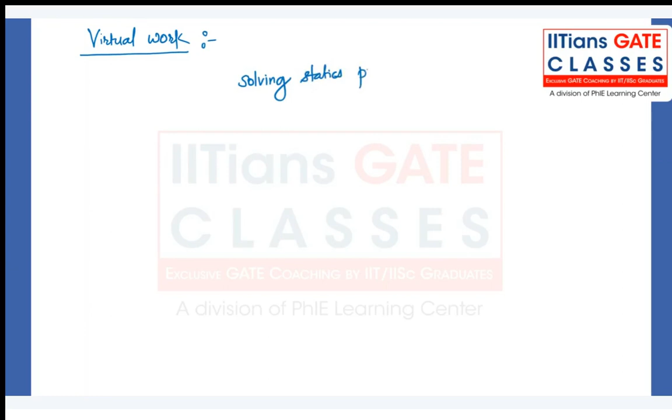So till now, if you remember, the way we solve problems is by using the equilibrium equations. Solving statics problems, there are two ways to do it: either with the equilibrium equations, summation of all forces equal to zero, summation of all moments equal to zero. Depending on direction, you will apply summation x, summation y and all. And there is one more way, that is the virtual work method.

It is not mandatory that the problem should be solved by virtual work only, and that is the reason we have not studied it when we were studying statics. Generally, everyone prefers the equilibrium method and it is commonly used to solve problems. But there is an alternative method. You should be aware of it; you may not use it in future, but it is good to know. It's optional, you can still solve the problem with the equations of equilibrium. And we use it in statics mainly.

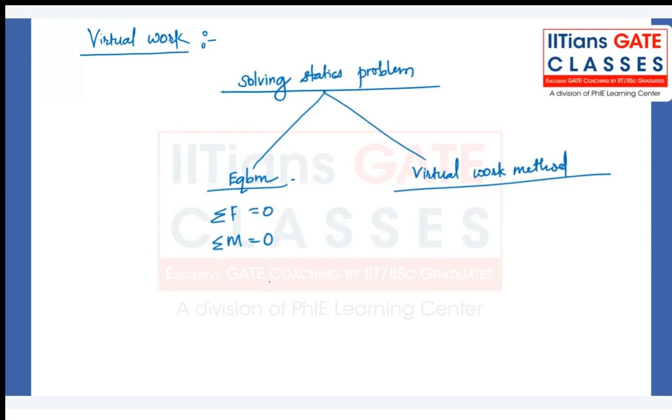When a body is in equilibrium, there is no displacement to the body. The body is at rest, and summation of all forces and moments equals 0. But if we imagine a displacement, let's call it a virtual displacement. You can denote it by delta theta or delta s, whatever notation you want. Generally delta s and delta theta are used for linear displacement and angular displacement.

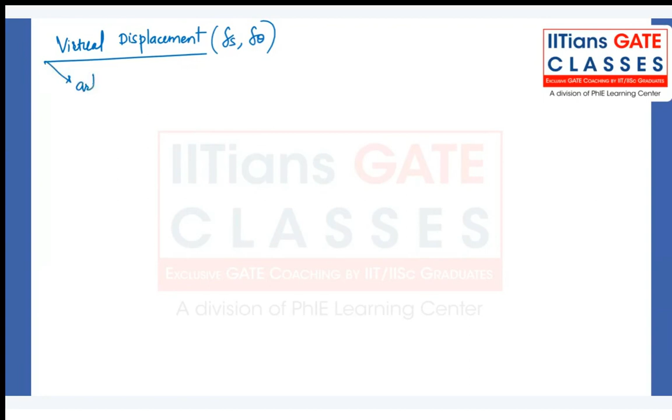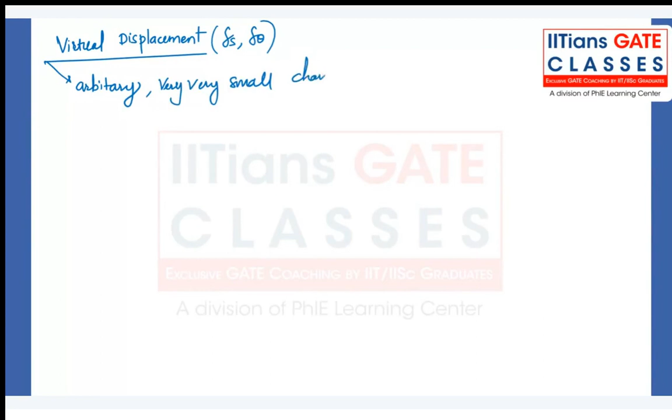Virtual displacement is an arbitrary, infinitesimally small change in the position of the particle, consistent with the constraint imposed on it. So write down the definition: virtual displacement of a particle is an arbitrary, infinitesimally small, very small change in the position of the particle, consistent with the constraint imposed on the particle.

So it's an imaginary displacement. In reality it is not happening, because the body is in equilibrium, it is at rest, it is not moving. But in order to solve it, we are imagining a small displacement, let's say delta s, and that will help us calculate work, because force into displacement is work, and it will help us solve the problem.

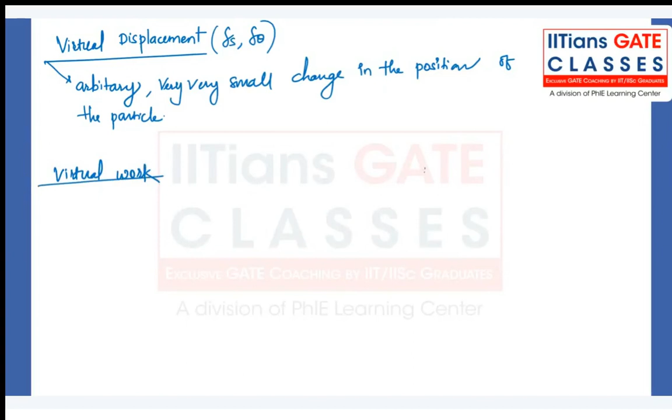So if we have a body like this, kept on a horizontal surface, and a force P is applied, and the imaginary displacement is delta s, then the work here will be P cos theta.

Okay, P cos of theta into delta S. Okay, delta S is a virtual displacement. Then this work, I'll say it as a virtual work. Okay, I hope you are getting it.

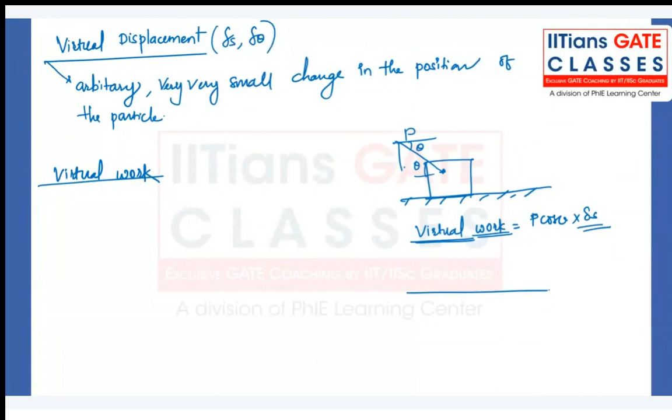Similarly, if we have, let's say, a beam and you are applying some moment over here, and because of this moment, let's say there is a small change in angle, that is delta theta, then work because of this moment is moment into theta, and in this case I'll call it a virtual work.

So what is virtual work? Virtual work is the work done in producing a virtual displacement. Work done in producing virtual displacement.

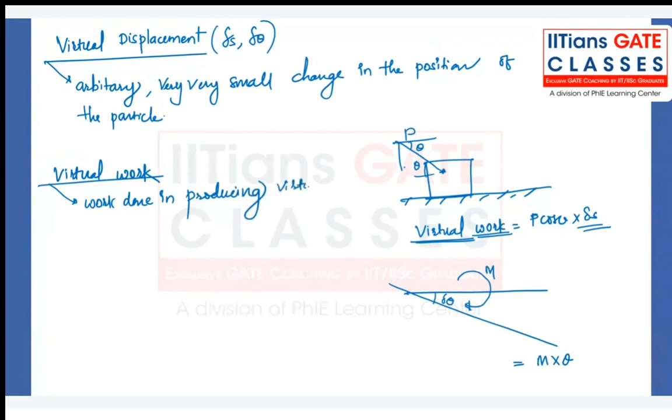Okay, so delta U, let's say virtual work, generally we denote it by delta U, and that is equal to F times delta S. Okay, and we know now what is virtual displacement, we know the force, and we also understood virtual work. But what is the principle of virtual work? What does this principle say? So write down the heading: principle of virtual work.

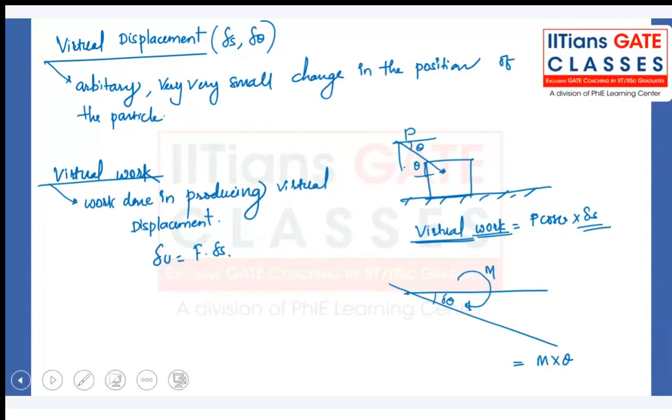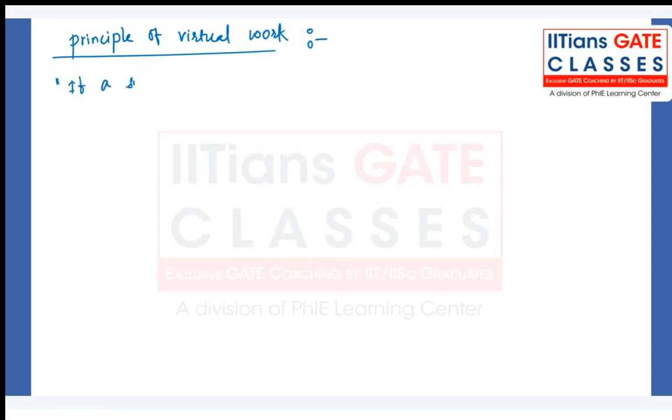Write down the heading: principle of virtual work. If a single rigid body, or a system of rigid bodies, is in equilibrium, then

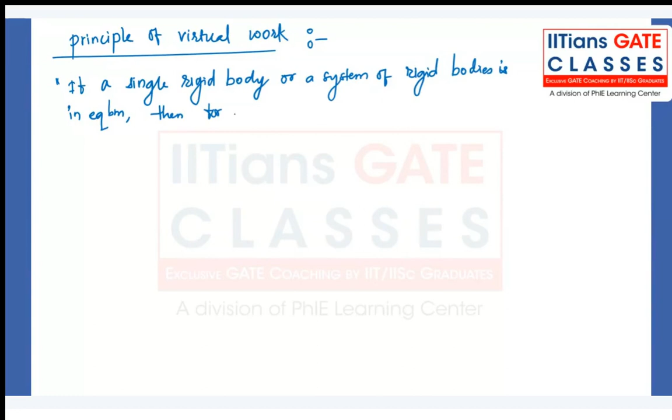for any virtual displacements with the constraints on the system, the virtual work done on the system is zero. Okay, so this is the statement of the

principle of virtual work. Okay, so in short, total virtual work of external forces acting on the body is zero. Or in other words, constraint on the system means, Abhishek, the supports which you are giving. So you are, let's say, giving a fixed support at one end maybe, or a roller support at the other end, so you are keeping it the same. It means your reactions will remain the same, they will not change.

So constraint means, as I explained, if you put a roller support, you're putting a constraint on the vertical motion of this beam. If you are putting a pin joint, you are putting the constraint not just on the vertical displacement but also on the horizontal displacement. And if you have a fixed support, then you are putting the constraint on the vertical direction, also the horizontal direction, and also on the moment.

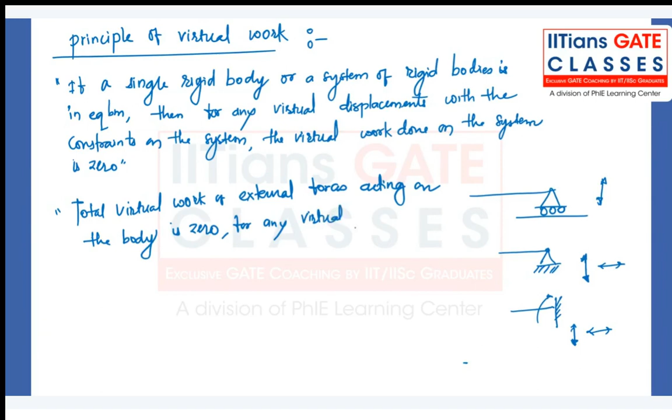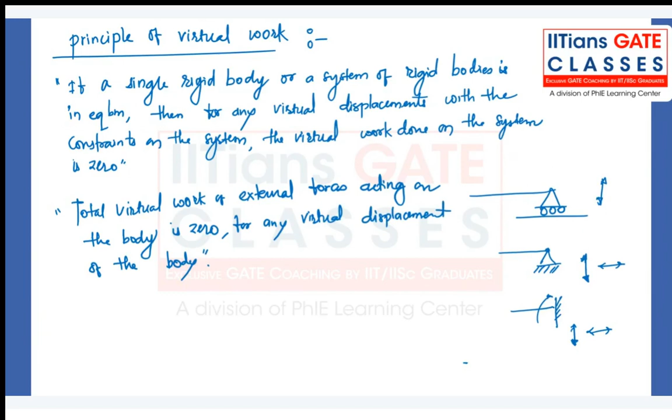Yeah. So in simple words, the statement can be written as: total virtual work of external forces acting on the body is zero for any virtual displacement of the body. Okay, so in this way also you can write the statement. Let's start with a simple understanding of it.

So if I give you a block and ask you to apply the equilibrium equation to it. Suppose I put a block of weight W and ask you to calculate the reaction from the ground. What you will say is, this block is at rest, it is in equilibrium, so summation of all forces in the vertical direction has to be zero. Ground will create a vertically upward reaction, that is N, and hence N will be equal to the weight of the body. That's all you will say, right? There is no need for any complexity in this.

But now, if you want to apply the principle of virtual work to this, how will it look? So let's say this is the centroid G, and imagine that G is moved because of the weight to G dash, something like this. There is a change in position in the vertical direction from G to G dash, and this position change is delta Y, for example. Delta S, so in the y direction, we take it as delta Y.

So what is the work done for this virtual displacement delta Y? Displacement is downward, weight is also acting downward, so it's positive work, W into delta Y, minus, since the reaction is upward, N times delta Y, is equal to 0.

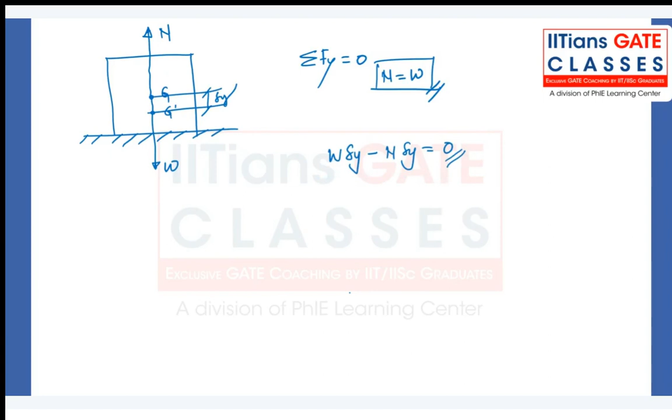According to the principle of virtual work, this is the total work done because of the external forces acting on the body, and that has to be 0. That is why we are writing equal to 0 here. Is it clear till this? And now if you equate, W delta Y is equal to N delta Y, and delta Y will get cancelled, and W is equal to N.

Okay, so this is the way we can still get the reaction if you don't want to use the equations of equilibrium. But ultimately it is the same thing, right? Generally everyone feels this is complicated or unnecessary extra work we are doing by applying the principle of virtual work, and nobody uses it mainly in real life, because the equations of equilibrium make life a little bit easier than the virtual work concept. But still you should be aware of it.

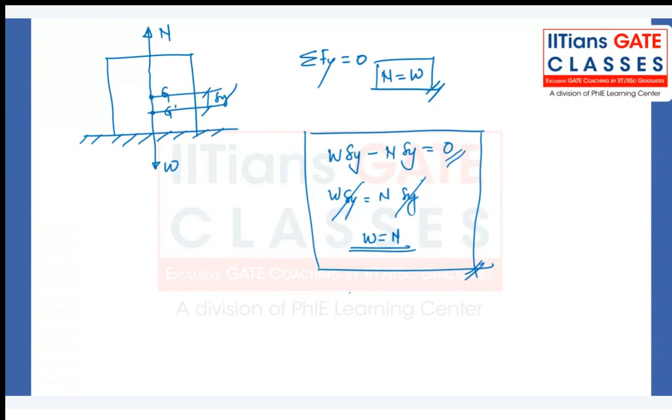In some cases, if you need, you will be able to solve it, maybe in some theory questions in future. But for GATE, they'll not specify that you have to solve the problem by virtual work. They just need the reactions, or they need the force. Then you will be able to calculate it just by equations of equilibrium.

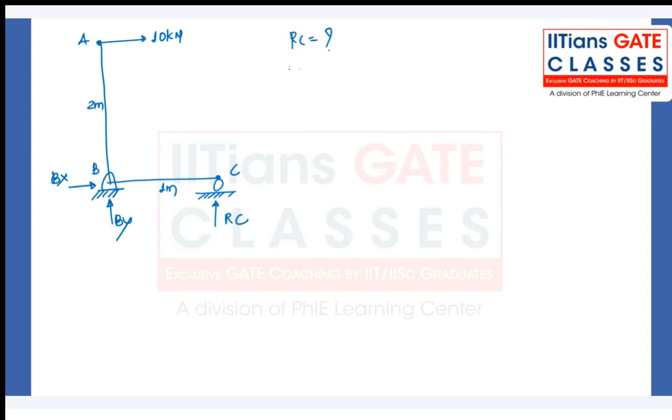Summation of all moments about point B is equal to 0. This is an equation of equilibrium you will apply. So you'll say 10 multiplied by 2 has to be equal to RC multiplied by 1. This implies RC is equal to 20. That's all. Within a few seconds, you will get the answer. But if I ask you to solve this by virtual work, it will look like this. Imagine that you are turning this with a displacement delta theta. Something like this it will look.

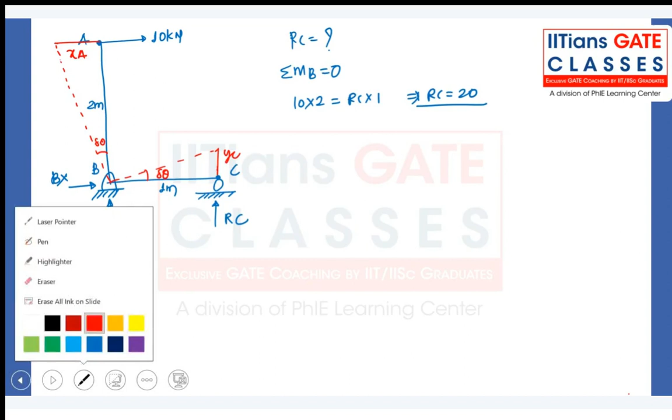Delta theta displacement, and let's say XC is the displacement here, and XA is the displacement over here. Or this should be YC because this is in the Y direction. YC is the vertical displacement of point C, XA is the horizontal displacement of point A. So if I want to calculate the value of XA, how much will it be? Apply the logic here, that is R theta, for a small displacement. So it is 2 delta theta, and YC I can say is 1 times delta theta, right?

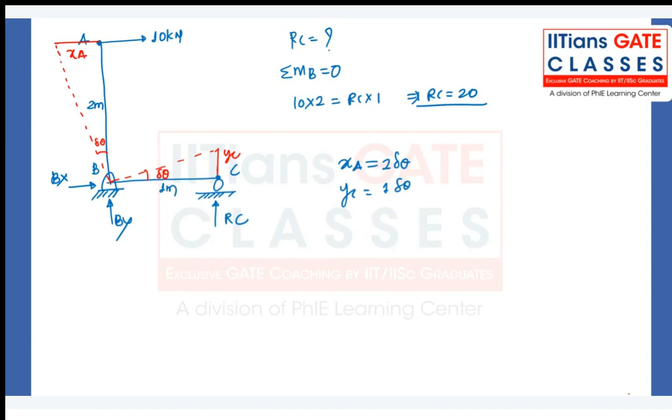And now if you calculate the work done here, 10 is applied in the rightward direction, but displacement is leftward, so it's negative work, minus 10 XA. Here RC is applied in the same direction as the displacement, so it's positive work done, RC into YC, that is equal to 0. And now if you put the XA value, XA is 2 times delta theta, plus RC times YC, which is 1 times delta theta, equal to 0. Delta theta will cancel, and you will get RC is equal to 20.

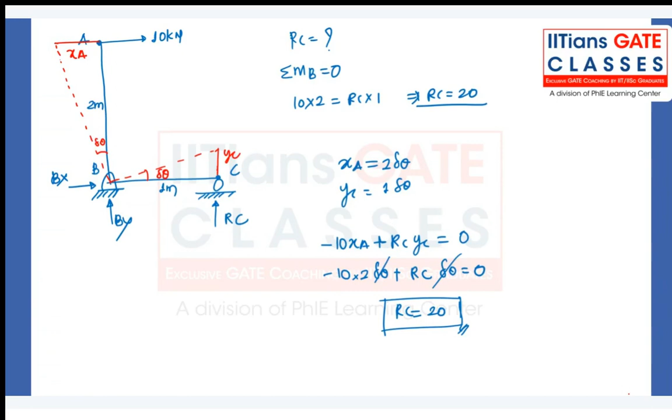In this way also you can find it, but you can clearly see here, compared to the equation of equilibrium, this takes a little more time, I would say, rather than saying it is complicated. But this is the way you can convert the problem into the work done, and the total work done of the system is 0, and that's how you will calculate the reactions.

Okay. Let me give you another simple question. Maybe this one you try to solve with the virtual work.

Yes, Abhishek, you can assume it as a clockwise moment as well. Okay, it's not a problem. So if you rotate it clockwise, what will happen? RC will be upward, but your YC will be downward. So in that case the equation will look something like this: minus RC into YC, and XA will be in the direction of 10, so plus 10 into XA equal to 0. This is how your equation will look, Abhishek. Is it clear?

And ultimately, you put this value, you should get RC.

Okay. Yeah, Sandeep, you can ask your doubt. You have raised your hand. Feel free to ask your doubt. You can unmute and ask. Yes, sir. Same question I was asking. You got it after that. Okay. Yes, no problem. Okay, sir.

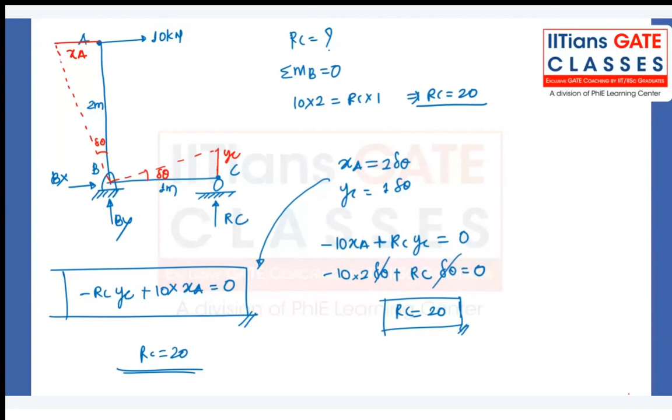Sir, the previous question I did not write. Okay. I'll wait for 2 minutes. You can write and just put a message in the group once you are done. Okay, fine.

Then take the next question. We have a pin support at one end, and at the other end we have the roller support. Let's call this point A. Here we have point B, and then we have point C. At point B, we are applying a load of 10 kilonewton. Point B is 2 meters from A, and C is 3 meters from point B. So the question here is, calculate RC.

If you use the equation of equilibrium, within a second you can answer it. 10 multiplied by 2 is equal to RC multiplied by 3, RC multiplied by 5, sorry. Hence RC will be equal to 4. That's all. Correct. But I want you to solve this question by virtual work, because we are studying that concept.

So imagine the displacement of points A, B, C about point A. Let's consider they are rotating about point A because we are putting the constraint at point A, and point C can freely move. You can do it about point C, that's not a problem, but let's keep it at point A because we want to find the reaction at point C.

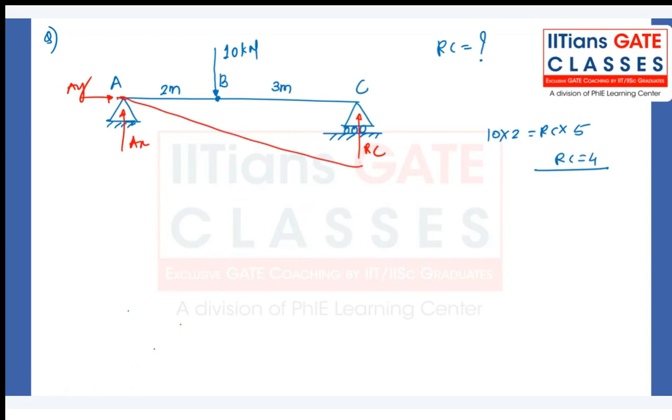Let me just draw the free body diagram first, the reactions here. RC will look like this, and this is AX, and this is AY. Why I'm rotating this about point A is because the unknown here is RC. That is what we have to calculate. If you want to calculate the reaction at A, then you can do it the other way around. Fine. This is RC. So this delta theta is a small angle with which we are rotating this beam.

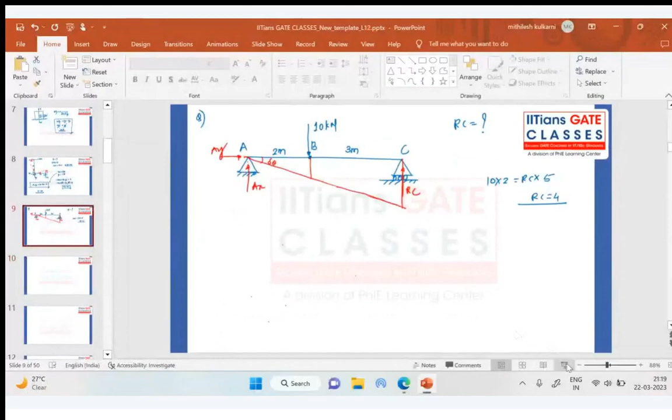Okay. Just a minute. Yeah. So I'll share again.

So now, let's say this is the displacement at point B. We can call it YB, and here YC is the displacement. B to B dash is YB, and C to C dash is YC. So what is YB? YB here is delta theta into 2, so 2 delta theta. And what is YC here? It's 5 delta theta.

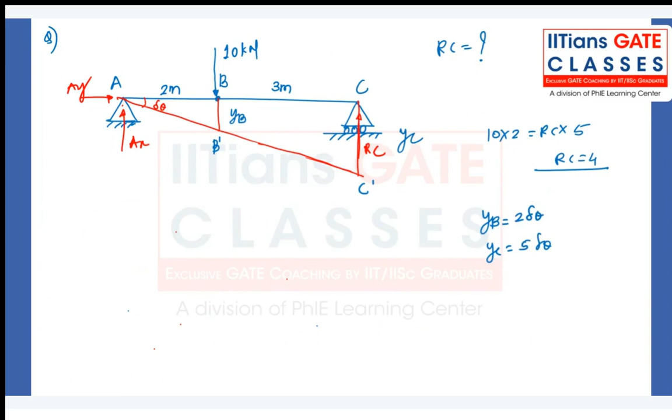Now, according to the principle of virtual work, total virtual work is equal to 0. And how much is the total virtual work here? We have 10 into YB minus RC into YC equal to 0. We consider this as positive work and this as negative work because of the direction of the force and the displacement. If it is the same, we consider it positive. If it is opposite, we consider it negative.

So from this we get 10 times YB is equal to RC times YC. YB is 2 times delta theta, and YC is 5 times delta theta. So delta theta will get cancelled. 20 divided by 5 is 4. So RC is equal to 4 kilonewton.

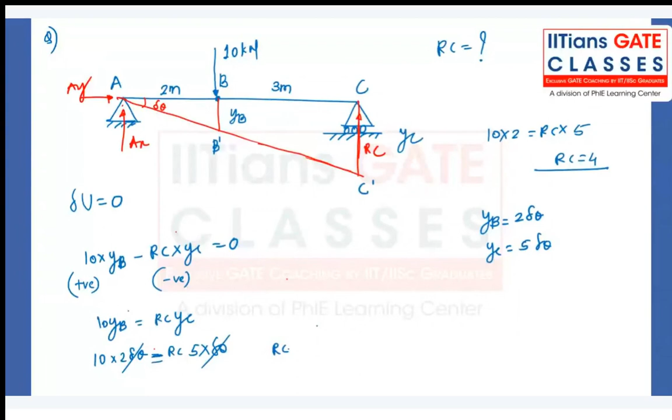So you can solve the problem either by equation of equilibrium or by virtual work. It's more or less the same, but generally I would suggest you use the normal equation of equilibrium, because this adds a little bit of complexity to the problem and will take more of your time. Okay.

So this problem is useful everywhere. It's not like this is an alternative way. You might have studied, let's say, the vibration topic, and in the vibration topic you are creating the equation of motion not with just one method, but you can use multiple methods to solve it, right? And that's what we'll study again in the Lagrange equation as well, when I come to there. So it's an alternative method. I would not say that in this case of problems you should use this, and in another set you should use that. It's not like that. It's an alternative method you can use for any problem.

In the principle of virtual work, the concept or methodology, or approach, which they are using is the work approach. That is, the total work done by the system, if it is in equilibrium, is zero. And that is the approach this concept is having. And the initial concept, that is the equilibrium concept, is that the summation of all the forces and moments when the body is in equilibrium is zero. Okay, so these two are parallel approaches, and both are equal.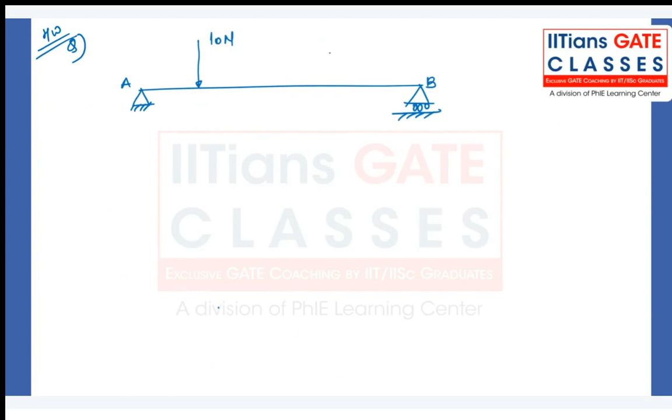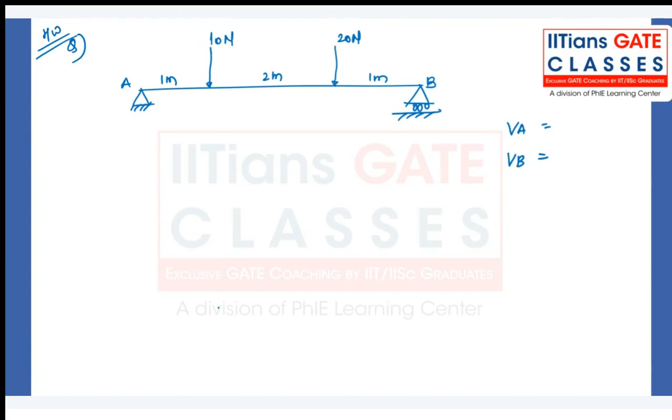So here, in this problem, AB is the beam. A simply supported beam, and then we have a 10 Newton force. Then we have a 20 Newton force. This is 2 meter distance, this is 1 meter distance, and this is again 1 meter distance. Total is 4 meter distance. What you have to calculate is VA and VB. Both of them you have to calculate, and try to calculate by using the principle of virtual work. I'll give the answers: VA is 17.5 Newton, and this is 12.7 Newton.

You can easily calculate it by equations of equilibrium, by taking moments and summation of vertical forces equal to 0. But I want you to try this problem with the principle of virtual work. And if you face any difficulty, feel free to reach out to me. I can help you with the answer. Okay, so take this for your homework.

Yes, Abhishek, I'll share the question bank with you. So what happened is, we are taking a lot of problem solving sessions. You might have observed that the majority of the classes are focused on problems, because we have very little theory in mechanics, and we have to understand the theory from the problems itself. The concepts are very small, but when we study a variety of problems, their application is a little bit different, and you should know how to deal with a variety of problems. That is the reason we focused on problems. So I have some sets of problems, and I will give them to you through WhatsApp on a weekly basis, and you can work on them. Okay, so that's how we can do it.

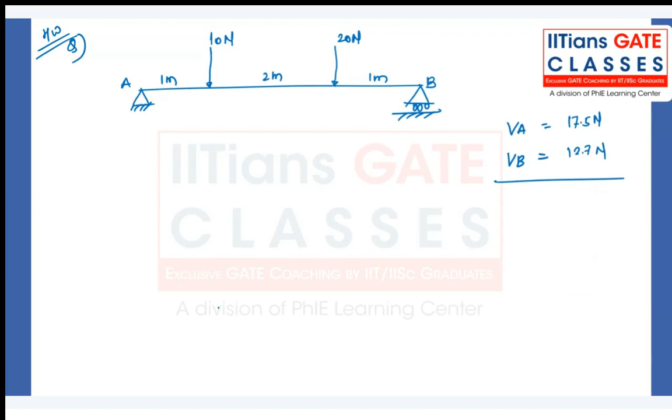Write down next heading: Lagrange's equation. Lagrange equation. Okay. Again, we are studying it at the end. Why? Because it's not the only method to use in the kinetics in order to generate the equation of motion. Okay, when you will study the vibrations topic, you will understand how to create the equation of motion. Okay, and there are variety of methods to create the equation of motion.

So for example, potential energy equal to kinetic energy you will do, or sum of all the energy equal to zero, or you will use the equilibrium method. So couple of methods are there which will help you to generate the equation of motion for the system. Okay, and what we use is we use the D'Alembert's principle, right? We use D'Alembert's principle to generate the equation of motion and solve it.

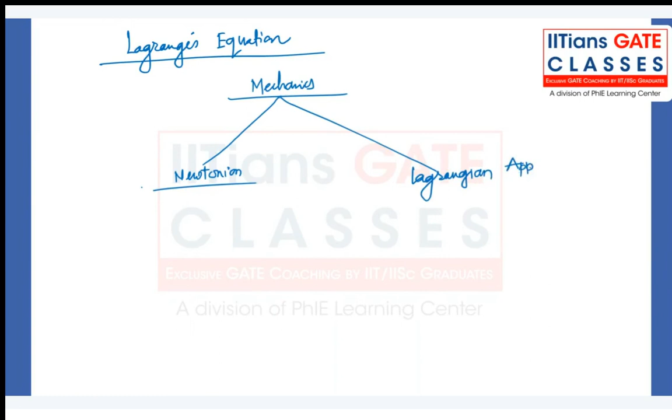Okay, so for example, let's say we have, or let me just introduce it like this. In mechanics, either you can use this approach of Newtonian approach, Newtonian approach, or Lagrangian approach. Okay, so what is the difference in between them? We know in Newtonian approach how it works.

It works on summation of the forces is equal to mass times acceleration, and then you applied ma as an, let's say, imaginary force or inertia force opposite to the direction of motion and solve the problems. Okay, so we have generated the free body diagram of it, and then we calculate the forces on it, and then applied the dynamic equilibrium considering this equation. Correct, that is what we have done in the Newtonian approach, which works on D'Alembert's principle. Okay, or even let's say work energy principle also we studied. There also we calculated the free body diagram, forces, and then we have applied the work energy principle.

But how this Lagrangian approach works? It is based on the energy formulation, and it looks like this. Maybe I'll go to the next slide and say Lagrangian method is revolving around a parameter called as L. Okay, and you can call it as Lagrangian. So L is equal to, which L means Lagrangian. Okay, the variable L is Lagrangian, and that is the difference between the kinetic energy minus potential energy. Okay, kinetic energy minus potential energy.

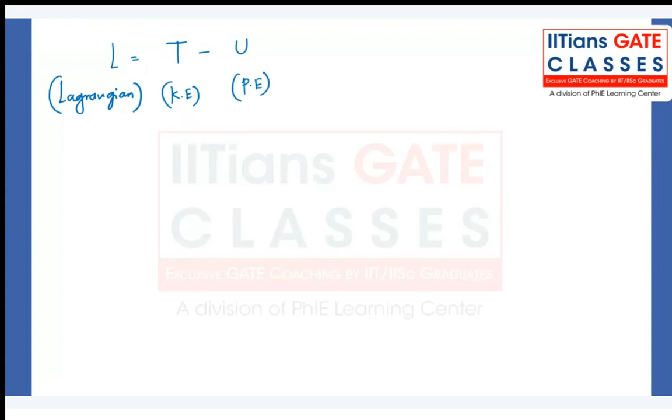So what is this L, T, U, and all we will see, and how it will help to generate the equation of motion. That is the main question. Okay, so what is this L? L is Lagrangian, and L is the function of Q, Q dot, and T. Okay, then what is this new Q, Q dot? T we know, T is time. And what is this Q and Q dot?

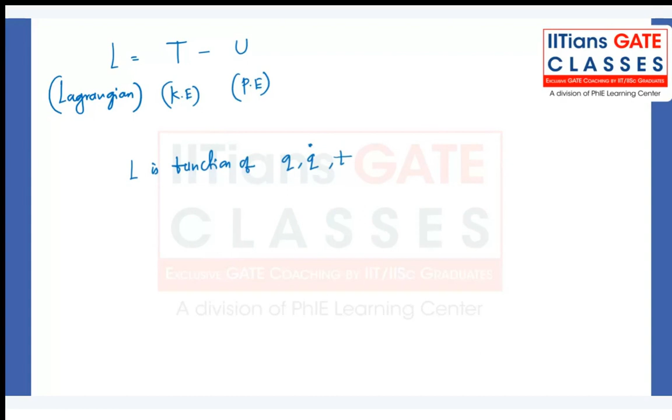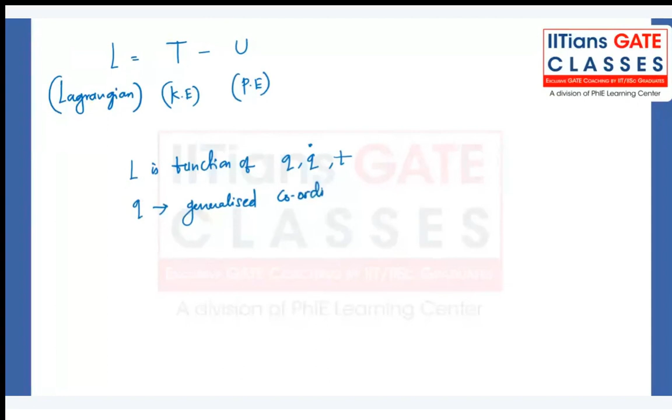Q is any generalized coordinate. Okay, generalized coordinates, you can say. It can be X, it can be Y, it can be Z, theta, anything, etc. Okay, so in linear system, it will be X, Y, Z. What is Q dot? Is generalized velocity, you can say, because Q dot is differentiation of Q with respect to time, and you can say it as a velocity. So it's a generalized velocity. Velocity. And what is T?

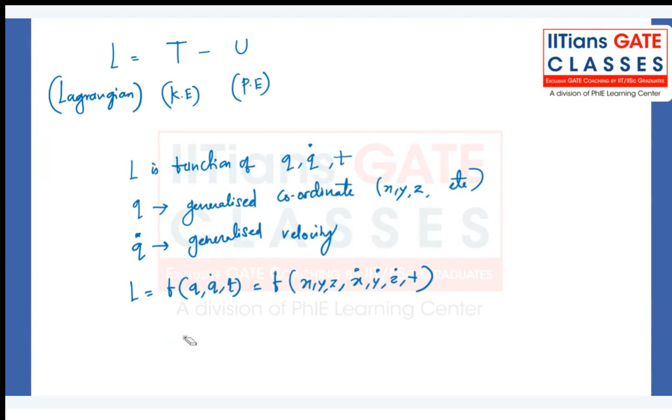T is the time. So what we can say is L is function of Q, Q dot and T. It means indirectly L is the function of X, Y, Z, X dot, Y dot and Z dot and T. Okay. And how this L will help us in order to generate the equation of motion is d by dt, or let me go to the next slide, d by dt of dou L by dou Q dot minus dou L by dou Q equal to 0. So this is the equation of motion, or you can say it as a Lagrangian equation. Let's call it as Lagrangian equation.

Screenshot. Yes. Sir, previous page, sir. Sir, you are very fast, sir. You are changing the page very fastly. Okay, sir. I'll go to the previous slide. I'm just writing the stuff first, and then I will. Okay, sir. Because I just want you to first follow it, and then you can write it.

Because this might be a new topic for most of you, and it is recently added to the GATE from last 2 years. Previously it was not there. I'm not sure whether you have studied it in your syllabus. Some of you might have studied it in vibrations topic, and I'll say it's not compulsory. It is an alternative method to what we have studied. Okay, so the problems which we have studied before, the same problems we'll be studying here, but with the Lagrangian approach of solving it. Okay.

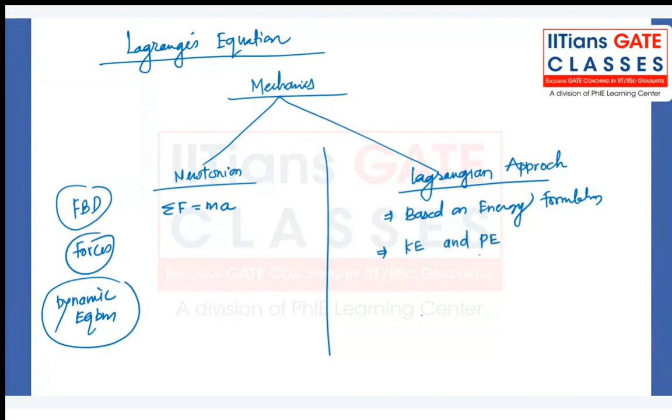Okay. So write down from the beginning now. I hope you are done with this first slide. I have just explained what the two different approaches are. One is the Newtonian approach based on the summation of forces equal to mass times acceleration, whereas the Lagrangian approach is mainly based on the kinetic energy and potential energy. Lagrangian L is equal to kinetic energy minus potential energy. So the difference between them is L.

And here I'm explaining what L is a function of. L is a function of x, y, z, x dot, y dot, z dot, and t. Okay. Let me know once you're done with this slide.

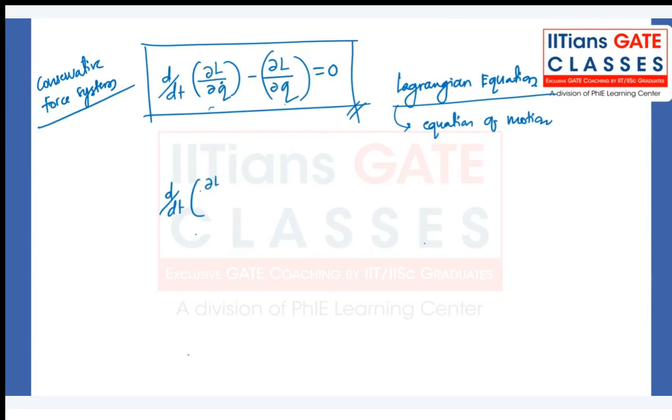Yeah, okay. You can also write down the next equation like this. This equation is for the conservative force system. And the same equation will look like this: d by dt of dou L by dou Q dot minus dou L by dou Q equal to F non-conservative. So this equation is for the non-conservative force system. So what is a non-conservative force system and what is a conservative force system?

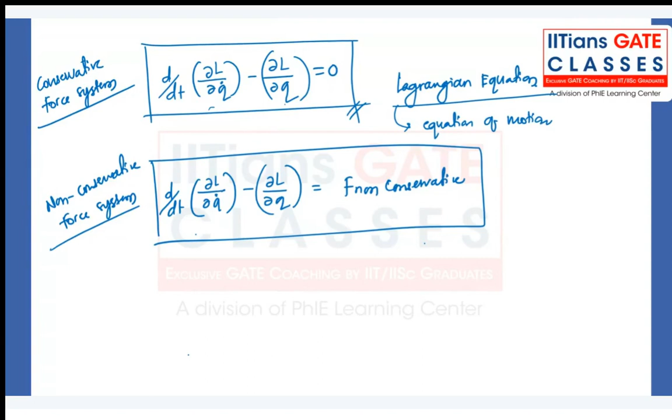A force where the work done is independent of path but depends on initial and final positions only, we call a conservative force system. For example, gravity force, spring force, tension in the string, etc., are considered conservative. Non-conservative forces include, for example, fluid friction, normal friction, or air drag in the system. If you want to consider these in the problem, then it belongs to a non-conservative force system problem, and in that case you will use the second equation.

But as of now we will focus only on the conservative force system, where we'll not be considering drag or fluid friction. So this is just for your information, that if you consider the frictions and all, then it will look like this.

Yes, Nishant, we will be solving questions on this. I'm just explaining the theory part. Once it is done, we will go towards the problems. Okay, are you done with this slide?

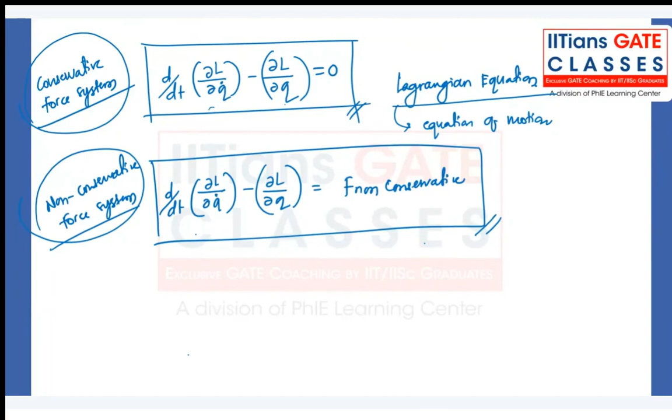Okay, so let's start with some simple questions first. For example, a ball is there which is freely falling downward. If I ask you to calculate the equation of motion in this case, how will it look? So we have a ball of mass m freely falling downwards. Let's see how the acceleration will look in this case. What will be the acceleration in this case?

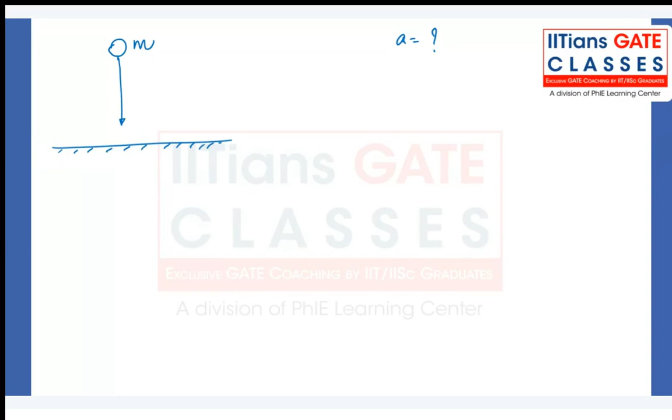Yeah, it is g. So it's a freely falling object. Mg will be the weight acting downward, and inertia force will be mass times acceleration. You can easily say the acceleration in this case is just the acceleration due to gravity. Okay, but you're not applying the Newtonian approach here. You want to apply the Lagrangian approach.

So you will first calculate the coordinates in this case. In this case, the movement is along the y direction. So what was the q? Q was the dimensions, right? Generalized coordinates you can say, and here that coordinate is y. So q is y in this case, and q dot will be y dot. So that is the velocity in the y direction.

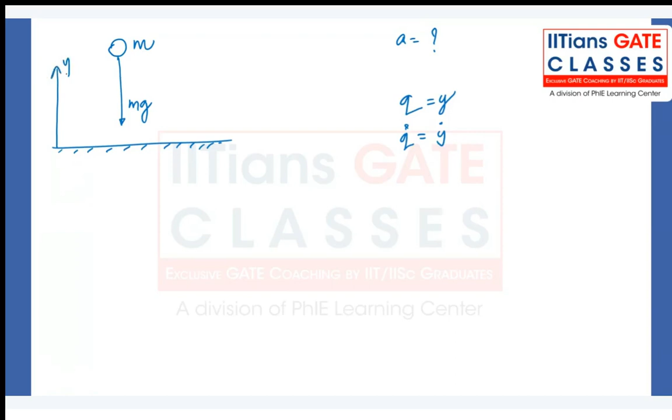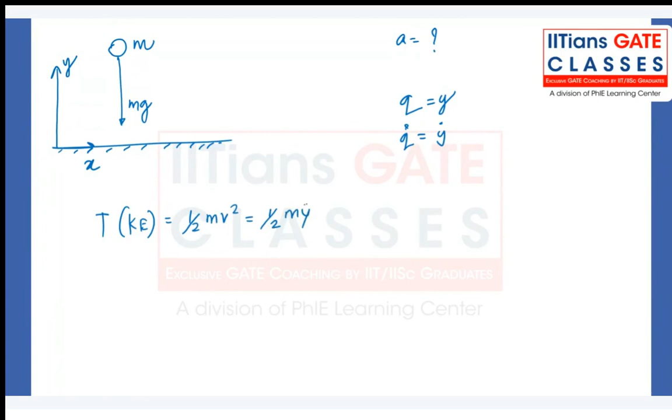Okay, so let's consider this as the y-axis and this as the x-axis. Our motion is only in the y direction, so our focus will be only on the y coordinate. How will the kinetic energy look? T is kinetic energy. Half mv square is the kinetic energy, so it will look like half m y dot square. Is it correct? How will the potential energy look? Mgh, right? Mgh, and that will be equal to mgy.

And how will the Lagrangian look? That will be equal to T minus U. So it is half m y dot square minus mgy. Is it clear till this? So L will be equal to half m y dot square minus mgy. Let me go to the next slide to solve it further. Or before that you can write it down and let me know once you are done with this slide. Are you done with this slide? Yeah, okay.

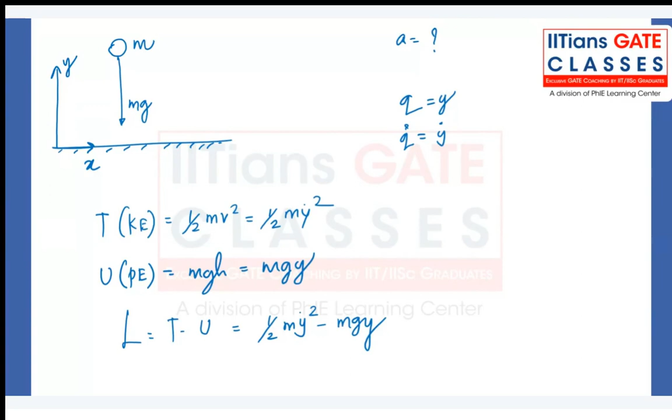So what was the L? 1/2 m y dot square minus mgy. And what is our equation of motion? If you remember, d by dt of dou L by dou q dot minus dou L by dou q is equal to 0. This is our equation of motion. So calculate these derivatives and put them into this equation.

Calculate the derivatives. So how will dou L by dou q look? It will be minus mg, because dou L by dou q means dou L by dou y. Q is y in this case. Similarly, dou L by dou q dot is dou L by dou y dot. We have to differentiate with respect to y dot, and the 2 will get cancelled. You will get only m y dot.

Basically, 1/2 as it is, m as it is. Differentiation of y dot square is 2 y dot. The 2 will get cancelled, and it is m y dot. Is it clear till this? And then d by dt of dou L by dou q dot is the differentiation of what we have just calculated with respect to t, which is m y double dot.

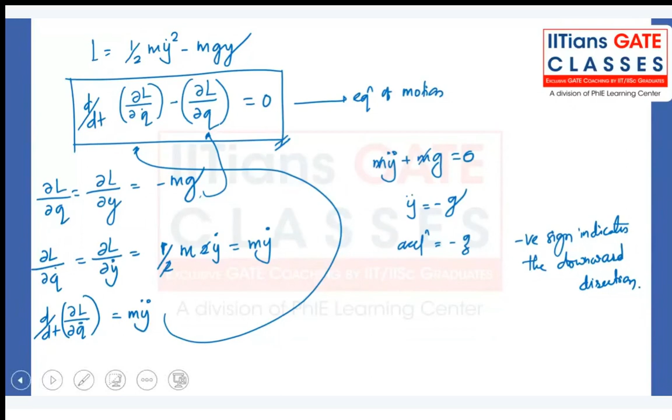I'm sure whoever will be teaching you vibrations will introduce this topic to you again there, so you will be aware of it during vibrations. But anyway, I will take an example here of a spring mass system so that it will be clear to you all. So in such kind of situations, you can go for this equation, the Lagrangian method.

Sanjeev Kumar, for the single degree of freedom systems, yeah, you can do it. Even for a 2 degree of freedom system, where, let's say, more than two variables are there, you can also use this method. It's not like you should restrict it to the single degree of freedom system. You can use this method for a 2 degree of freedom system as well. Okay.

It's your choice which you want to use, whichever you feel better, because I think whenever you study this topic, vibration, the teacher will introduce you to the methods which you can use to generate the equation of motion. Okay, so what I think is this Lagrange equation you can use from a mechanics point of view. I would say whenever a spring mass kind of system is there, in those cases it will be better if you apply this method.

Okay, but in all the rest of the cases, I would suggest you just go for D'Alembert's and the work energy principle. Don't even try this method. It will unnecessarily take more of your time. Okay, still I would say it is optional. It is not necessary that you should solve the problem with this. Okay, it comes with some additional complexity and more time. Okay, but yeah,

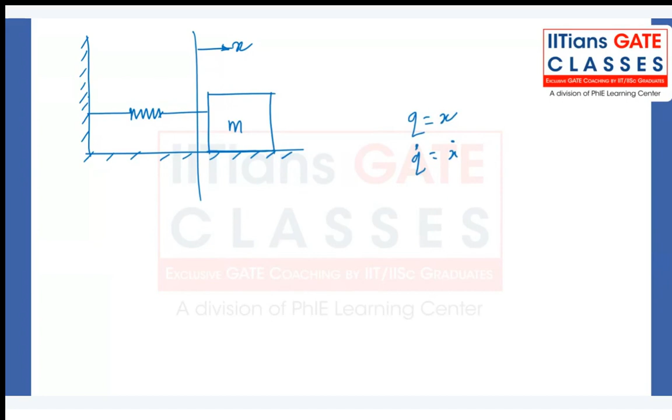Now here the generalized coordinate is x, q dot is x dot. So in this case, if I ask you to calculate the equation of motion, how will it look? In simple words, mx double dot plus kx equal to 0, right? This is how it will look. You might have studied this kind of equation before, mx double dot plus kx equal to 0.

So it's an equation of motion when you don't have any damper in the system, because here a damper is not attached, so that term we are not putting into the equation, and it's a free vibration because we are not showing any force here, so that's why we have equal to 0 on the right hand side. It's a typical equation of motion, simple harmonic motion, where we don't have any damping, and it's a free vibration. So how will you generate this equation by this Lagrangian method?

You will first calculate the kinetic energy T, that is 1/2 mv square. V is x dot here, so x dot square. Kinetic energy is that; potential energy U is half kx square. This is the potential energy of the spring with spring constant k, stiffness k. Okay, stiffness is k here, half kx square. So the Lagrangian L can be written as T minus U, which is equal to 1/2 mx dot square minus 1/2 kx square. Okay, so this is your L.

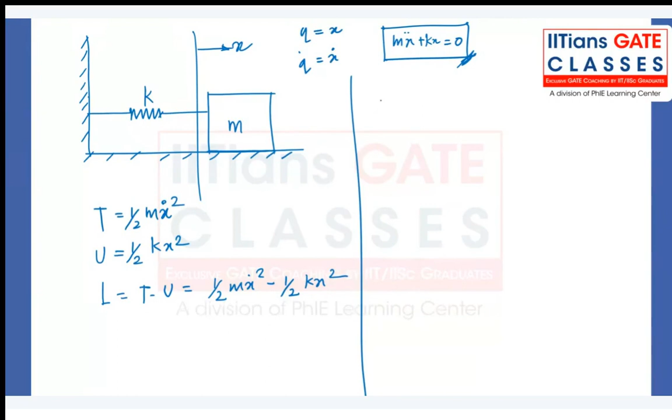Okay, so what will dou L by dou x look like? It will be minus kx. What will dou L by dou x dot look like? It will be how much? Mx dot. And what will d by dt of dou L by dou x dot look like? Yeah, it will be mx double dot. Okay, so if you put it into the equation of motion, what is the equation of motion?

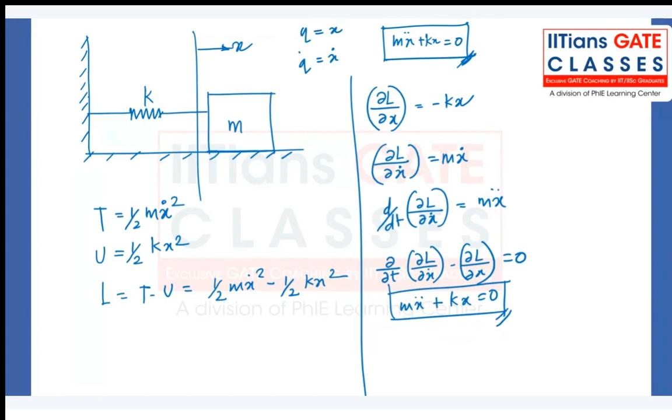d by dt of dou L by dou x dot minus dou L by dou x equal to 0. In this equation, if you put these in, you will get mx double dot plus kx, minus minus will become plus, equal to 0, and this is what I have already written before. This is the equation of motion. Okay, you can still solve the problem by using D'Alembert's principle.

Okay, you can still solve it by D'Alembert's principle, because m x double dot will be the imaginary force there, and kx will be the spring force, so ultimately you will end up with the same equation. Okay, so when you study mechanics, this question will be your basic first.

When you study vibration, this will be your first basic problem, where you will generate this equation not just by D'Alembert's principle, but also by the Lagrangian method, and I think one more method will be there. I think in total 3 methods are there to generate this. Okay, we have studied D'Alembert's principle before, and now this Lagrangian method is just an alternative to it.

So now x double dot plus k by m x equal to 0, and you know this k by m is omega square, and omega is root of k by m, that is your natural frequency. Okay, so in this kind of problem, I would say you can use the Lagrangian equation. Okay, so this is your second order equation. You can solve it to calculate the displacement. It's a homogeneous differential equation. The complementary function will be the solution for it if you want to calculate the displacement.

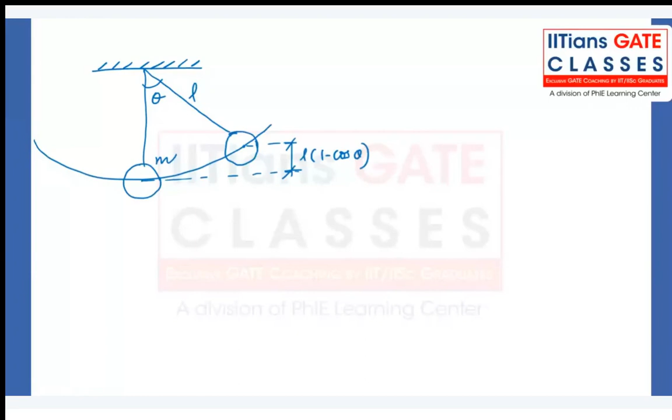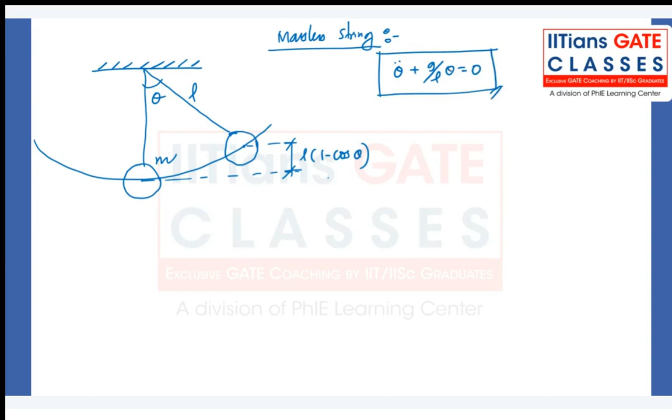You might have studied this equation before during class 12th or first year maybe. So theta double dot plus g by L theta equal to 0. Have you seen this equation before? Natural frequency of a simple pendulum you might have studied, right? Omega is root g by L. Yes. So how is it calculated? It's calculated based on this equation of motion.

And how is this equation of motion generated? By different methods you can generate it, and one of the methods is this. Either you can use D'Alembert's principle or you can use the energy method. So as of now we are studying the energy method, so focus on it. Calculate the Lagrange parameter, which is T minus V, and solve it.

Yes, Sanjeev, that method is also correct. Kinetic energy plus potential energy is constant, and differentiation of the total is equal to 0. So yes, you are also correct. That is what we have studied in the work energy principle, right?

Let's say total energy, kinetic energy plus potential energy at some location, and kinetic energy plus potential energy at some other location, is the same basically, right? So it is energy changing from one form to other. So if it is remaining constant, then its differentiation with respect to time is zero. So that approach also you can use in order to generate the equation of motion. You will study this in vibration.

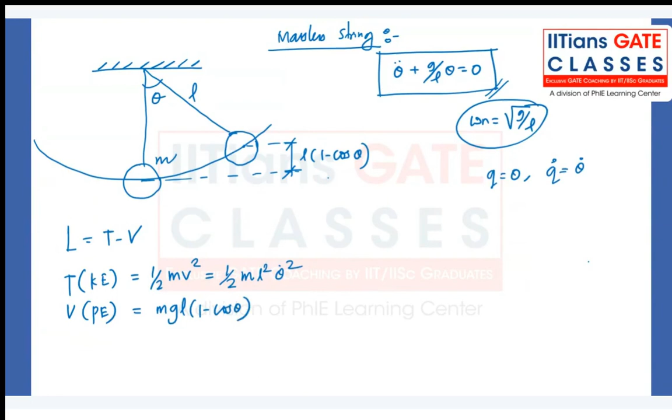Okay. Okay, so like this you can calculate the kinetic energy and potential energy. Yes, Sanjeev, you can write kinetic energy as half I omega square, and I is equal to ml square in this case. So that method is also correct, or you can use this method, whichever you feel you want to use, you can use it.

Okay. So here we are considering a massless string, so you should not consider any mass of string and all, just consider the mass of the ball. So these are the two energies you will get, and how the L will look like. I'll go to the next slide to write L. 1/2 m L square theta dot square. And what is the potential energy? Minus mgl times 1 minus cos of theta.

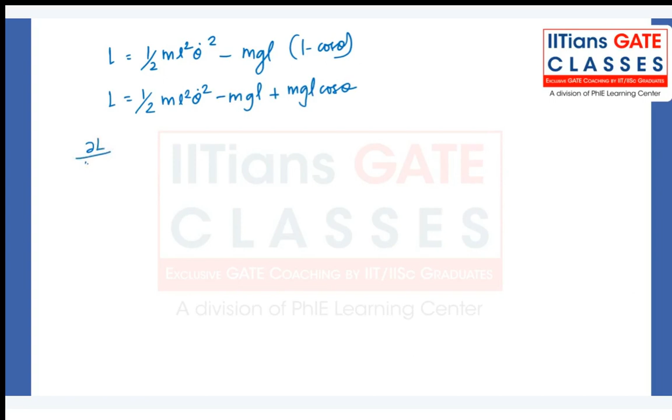So if you simplify it, it will look like this: half ml square theta dot square minus mgl plus mgl cos of theta. Okay, so this is L. Differentiation of L with respect to q means what? Dou L by dou theta, and that is minus mgl sin theta. Correct? Differentiation of L with respect to theta dot is what? mL square theta dot. This half and 2 will get cancelled.

And d by dt of dou L by dou q dot is ml square theta double dot. Okay, so if you put it in the equation, d by dt of dou L by dou q dot plus dou L by dou q equal to 0. This is the equation of motion. ml square theta double dot minus mgl, sorry, here it is minus, right?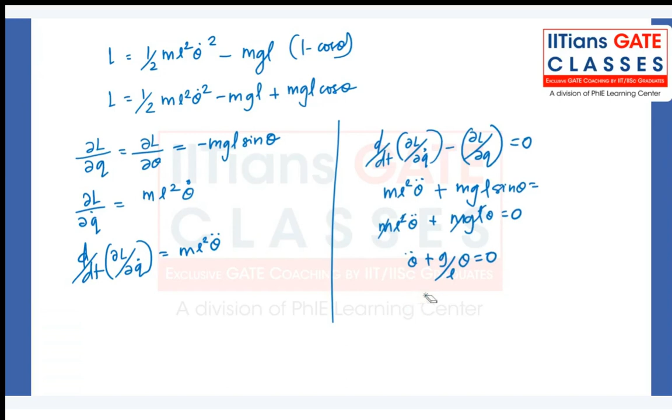In the main equation. So here it will be minus minus plus mgl, and for smaller theta you can write sine theta equal to theta. ml square theta double dot plus mgl theta equal to 0. M will get cancelled, one L will get cancelled. So theta double dot plus g by L times theta equal to 0. If you compare with this equation, theta double dot plus omega n square theta equal to 0, the natural frequency of this is under root of g by L.

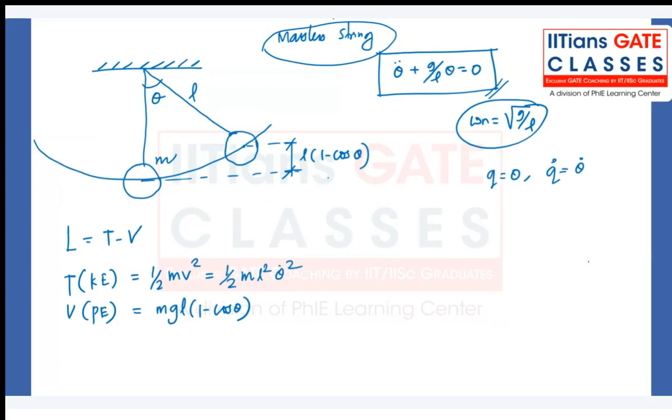Okay. Any doubt? Yes, I'll go to the previous slide. Write it down. I will wait for 2 minutes. You can write the things. Okay. Are you done with this slide? Yeah, okay. You can write the second slide as well and let me know once it is done. Done. Okay. Is it done? The slide as well?

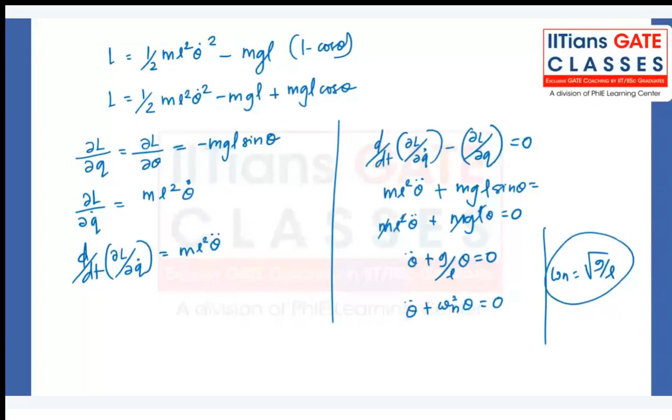Or how you will calculate, let's say, the acceleration of the first, y1 double dot. So how to calculate y1 double dot or acceleration, or how you will write the equation of motion. Both are like the same things. So you can create the equation of motion for this. Okay, I'll give you 2-3 minutes. Try to spend some time and solve it.

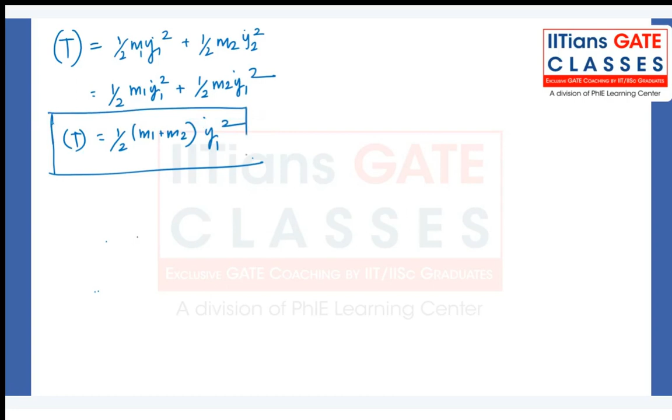So this is the kinetic energy. How will the potential energy look? m1 g y1 and m2 g y2, that is m1 g y1 plus m2 g (c minus y1).

Okay, we got one question here. There is a negative sign? Where is the negative sign? It's a square, right? So if you take the square of a negative number, that will be positive. Why is it negative, Nishant? Why are you saying it is negative?

With the Lagrangian approach, we are not considering the approach of forces to draw free body diagrams and apply the tensions and all. Okay, we are considering the energy approach. We are calculating the kinetic energy of the system and the potential energy of the system.

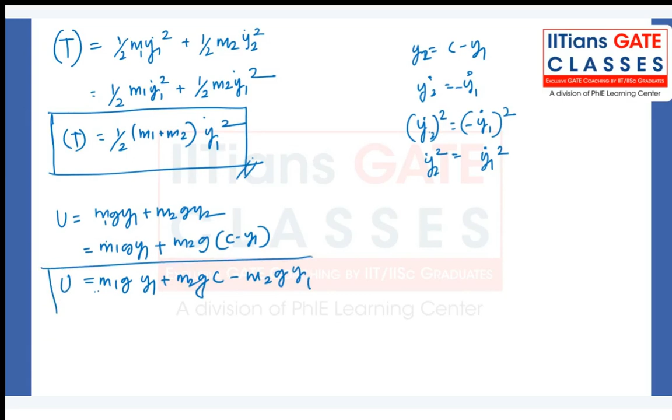Coming towards the potential energy, here I'll write the negative sign because it is not a square. y2 I am writing as c minus y1. So m1 g y1 plus m2 g c minus m2 g y1. Okay, this is your potential energy. So write till this and then let me know once you are done, so that I can calculate the Lagrangian and then the equation of motion.

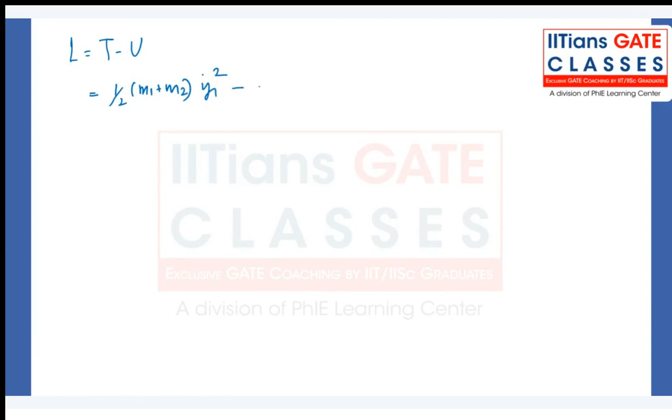Have you solved it? Okay, I'll go to the next slide and help you. L is written as T minus U, and that is 1/2 (m1 plus m2) y1 dot square minus m1 g y1 minus m2 g c plus m2 g y1. Signs are changed because we have minus here, T minus U.

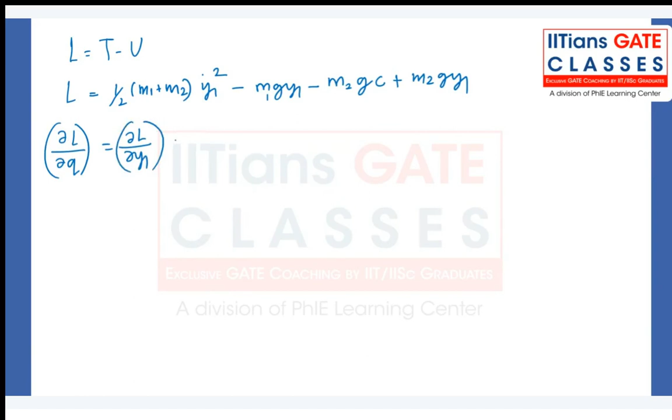Now again you have to differentiate the Lagrangian with respect to q, that is dou L by dou y1, and that is equal to how much? Only these terms will come: minus m1 g plus m2 g. So you can say (m2 minus m1) times g.

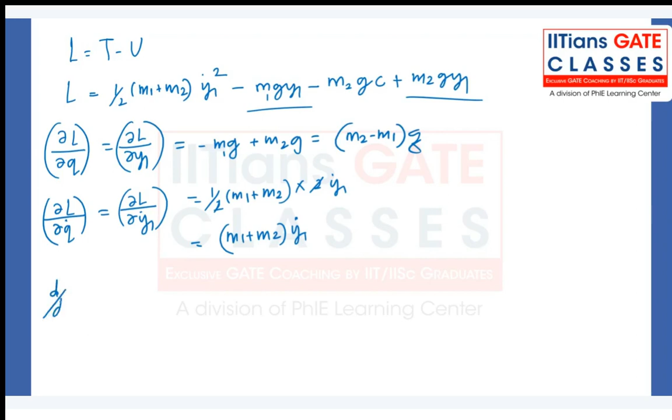Then dou L by dou q dot will be equal to dou L by dou y1 dot, and that is 1/2 into (m1 plus m2) into 2 times y1 dot. So 2 will get cancelled: (m1 plus m2) times y1 dot. Let's differentiate this again with respect to t, that is equal to (m1 plus m2) y1 double dot.

So now if you put it into the equation, what is our equation? d by dt of dou L by dou q dot minus dou L by dou q equal to 0. This is our Lagrangian equation, which gives us the equation of motion. So it will look like (m1 plus m2) y1 double dot, sorry, minus sign here, minus (m2 minus m1) times g equal to 0.

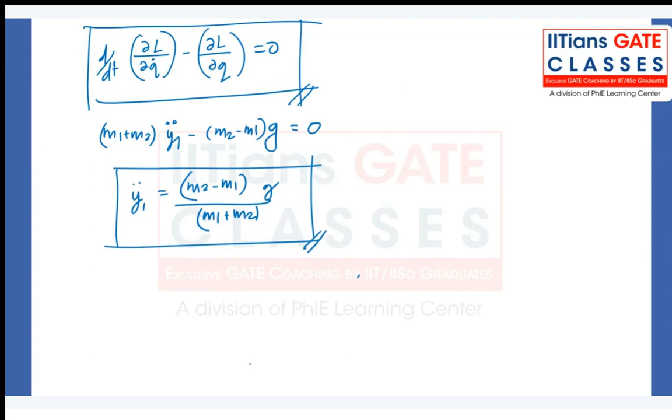So y1 double dot is equal to (m2 minus m1) divided by (m1 plus m2) times g. So this is how the answer will look. Okay, is it clear? This is how you'll calculate the acceleration.

Pranjul, the sign I think you got is plus. It should be minus. Yep, corrected. I'll go to the previous slide. Thank you.

So as you can see, in the majority of the questions, what we are doing is calculating the equation of motion, and that will help you to calculate the natural frequencies or how the acceleration will look, and then you can solve it to get the displacement by using the mathematics, that is complementary function and all.

So I would suggest whenever you have vibration related topics, whenever a system consists of dampers, springs and all, you should try this method. Otherwise, if a normal question comes, I would suggest you go ahead with the traditional Newtonian approach, which is mainly focused on forces and free body diagrams. That is comparatively easy, we have been studying it during our engineering, so you are more habituated to it, and comparatively it is simpler.

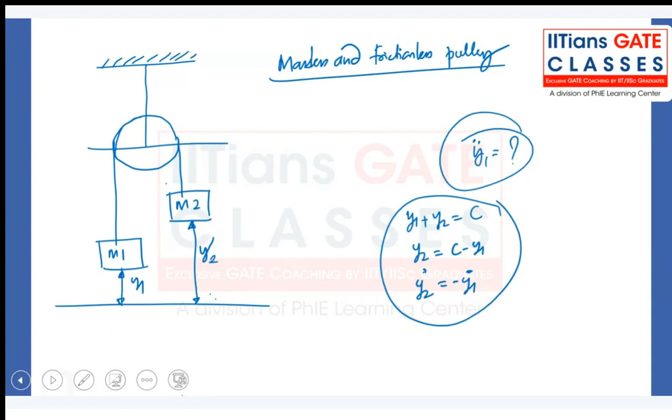Okay, so in order to calculate the acceleration, if I give you this problem, you can easily calculate with free body diagrams and applying the equations of dynamic equilibrium to it, right? But now if you are using this Lagrangian approach, it takes a little time. You have to first calculate kinetic energy, potential energy, put it into L, differentiate it, put it back again in the formula. So a lot of steps are involved in it, and it is a little time consuming.

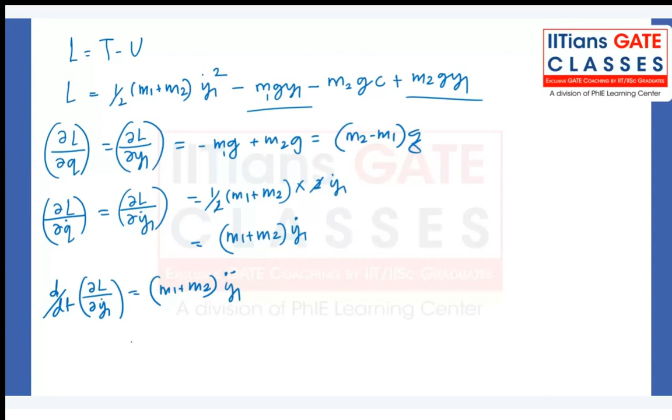Okay, and whenever a question comes in GATE, they are not specifically asking you to solve with this particular method. They are simply asking you the question, and you have to apply whichever method you feel. So for normal questions, I would suggest the majority should be done with the normal Newtonian approach. You should not use the Lagrangian approach. Only maybe in vibration topics, when you study that subject, this concept is helpful. Okay, but now I hope you are aware of the process to generate the equation of motion.

Is there any doubt in these two topics, virtual work and Lagrangian equation? Both are optional topics. Okay, they are not compulsory topics or compulsory methods to solve the problems. That is the reason we kept them at the end, because they will not affect the overall understanding of the topic. They are just alternative methods to solve the problems.

Okay, is it clear till this? Anyone have any doubt? No doubt.